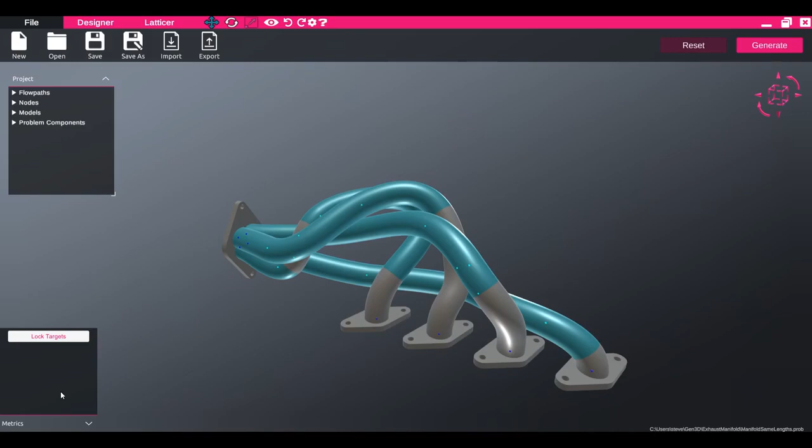So at the moment it's empty because nothing's selected, but I can select one node in the system and this will give me its X, Y, Z positions in space. If I hold down Control and select another node, so selecting two nodes will provide the delta, the X, Y, Z delta between the two nodes that I've selected.

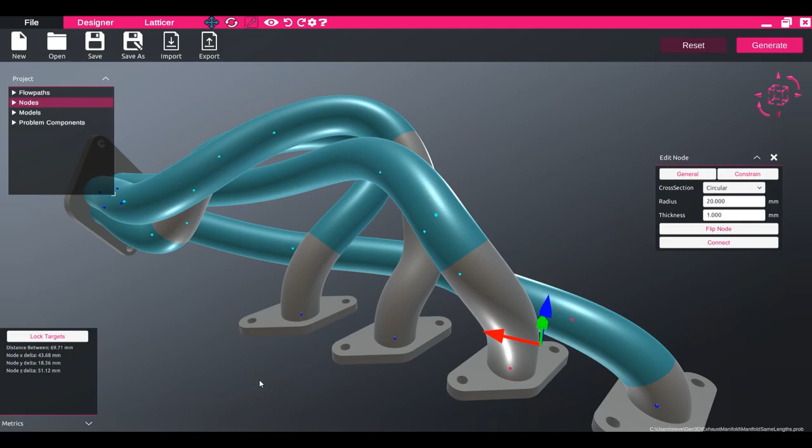But what's going to be interesting for us in this case is to get some more information about the flow paths. So in this case, I've got a design of an exhaust manifold. And what I want to do is create the exhaust manifold in such a way that the inlets and the outlets are the same distance, the same path length for each of the different flow paths.

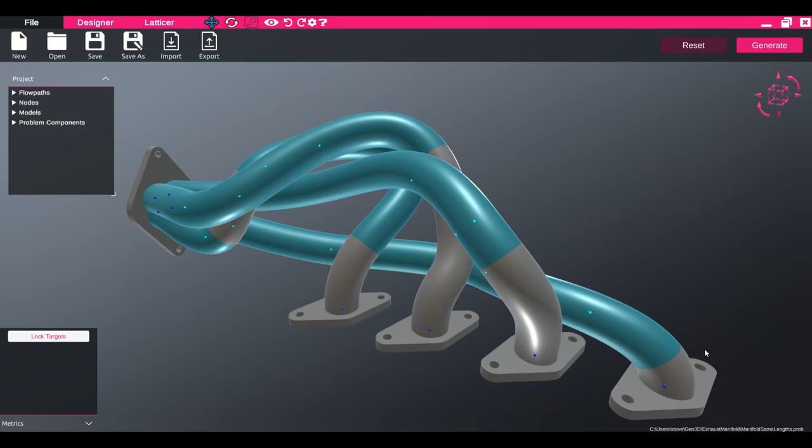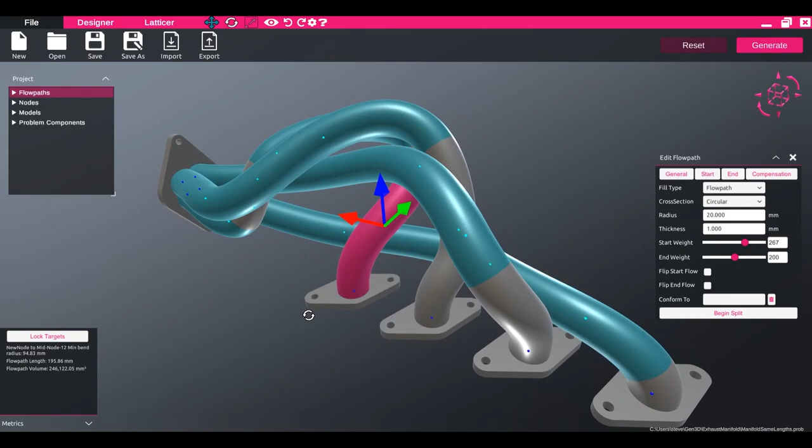So I can select a flow path, and this will give me some information about the bend radius of this flow path, some information about the flow path internal volume, but what's going to be interesting to me is this flow path length. And this is the length of the internal spline of the flow path, the central spline in essence.

So I've selected one here, but what I want to do is go around and select all of these flow paths by holding down Control and adding all of the flow paths in a single path to the same selection set. Now I've done this, we can see that my total flow path length is 657. Now suppose I wanted all of my lengths to be 660.

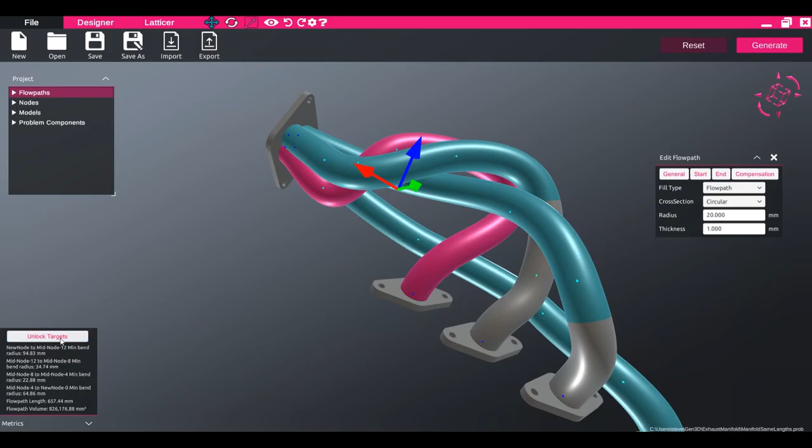Now I want to edit my flow paths so that they end up being this final length. But I also want to track my edits to see their impact on this final metric. So I can do this by locking the targets. And once this target's locked, it means that I'll be measuring that entire path length the whole time I make any edits.

So if I click on this node here and drag it to the left slightly, we can see this flow path updating in real time. So now it's at 658. I can also change the weightings of the flow paths, and this will also update the flow path. Or I could change the numbers in the start weight panel here, maybe 245.

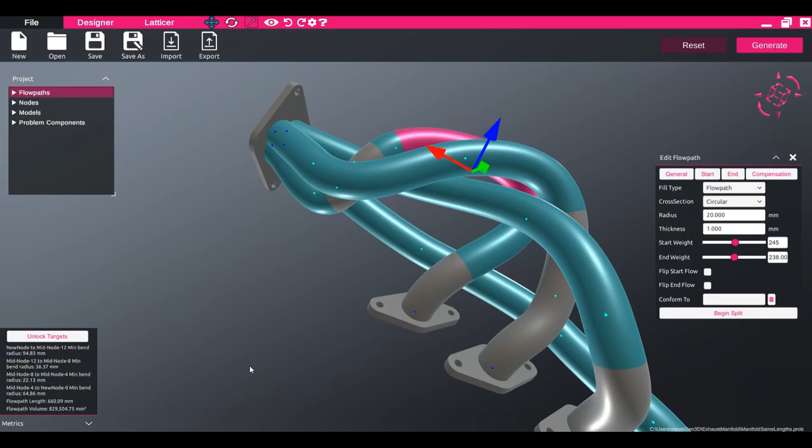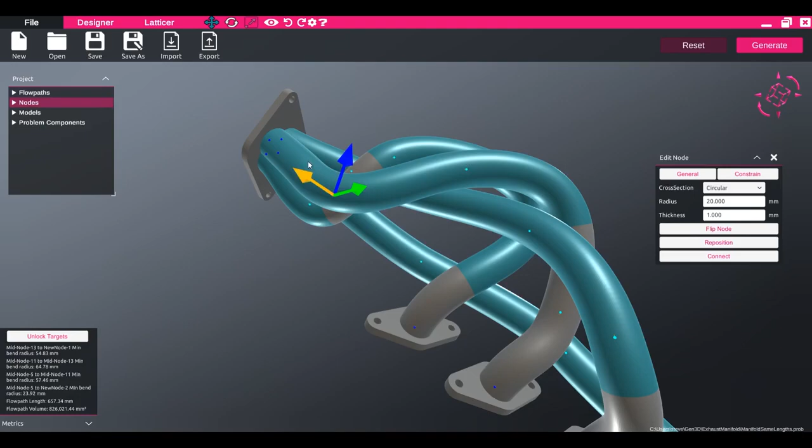We can pretty easily get to a state where the flow path length is within 1/10 of a millimeter, which is probably good for this particular use case. Once I'm done, I can unlock the target and select my next route by holding down Control and selecting the flow paths. And again, I can lock the targets and make any edits either by changing the node positions or changing the overall weighting of the flow path.